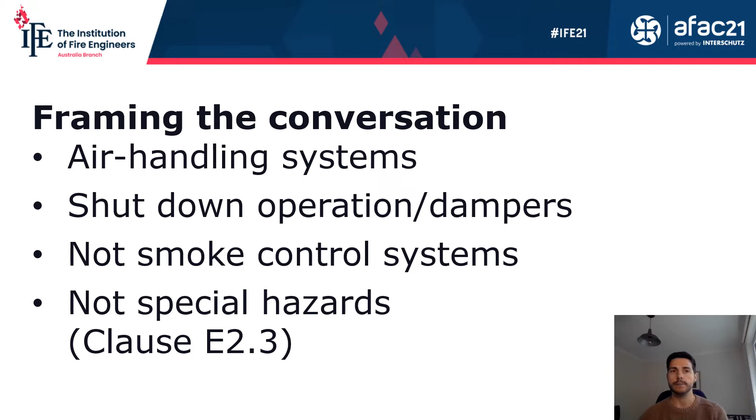I'll start off by giving you an overview of my presentation. First, I will talk about fire dampers and why fire dampers cannot necessarily protect against smoke spread through the air handling systems. I'll get into the changing construction practices around building envelope airtightness and how that affects the risk of smoke spread in buildings. That is followed by a discussion around what is acceptable levels of smoke spread between fire compartments.

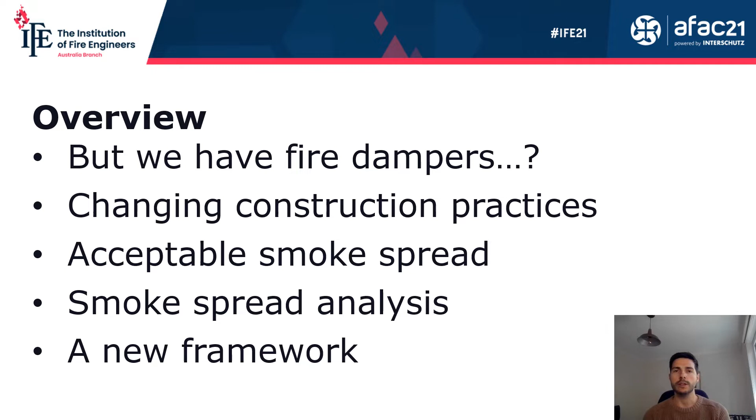Then I will relay the results of a technical analysis that was done in the proposal for change I submitted last year, which quantifies the amount of smoke that can spread between fire compartments. From that, I'll draw some conclusions and propose a new framework for deemed to satisfy compliance around smoke dampers.

There are a few key things that I want you to take away from my presentation today. Firstly, what I will say around smoke damper requirements and the interpretation of the deemed to satisfy provisions may conflict with your own interpretations and how you've practiced. It's not my intention to place any blame.

The DTS provisions around smoke dampers are very complex, and consequently it's no wonder that building practitioners differ in their interpretations. In my opinion, the deemed to satisfy provisions that govern smoke damper requirements are too complex and need to be amended to be made more clear.

Secondly, I'm going to show you that fire dampers cannot replace the need for smoke dampers. Each type of damper serves its own purpose.

Finally, the way we build buildings is changing. Increased air tightness of building envelopes and more prevalent internal sealing of compartments, for example with the use of smoke seals to doors, will have a dramatic effect on the risk of smoke spread in our buildings.

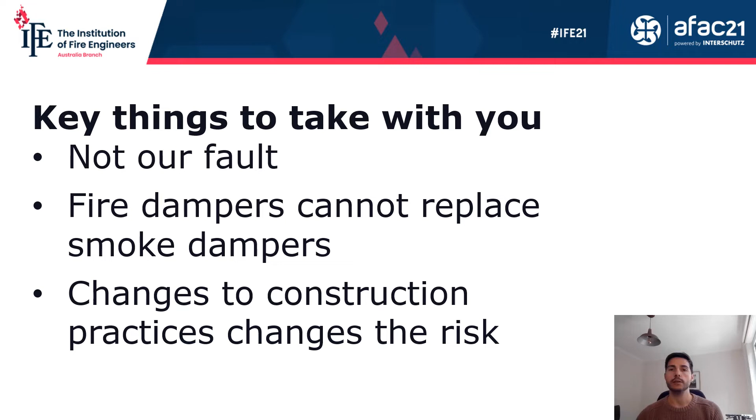Often I hear people say, why do I need smoke dampers when I have fire dampers in my air handling system? Well, to answer that question, we need to understand how a fire damper works. Fire dampers, as the name suggests, are there to mitigate fire spread.

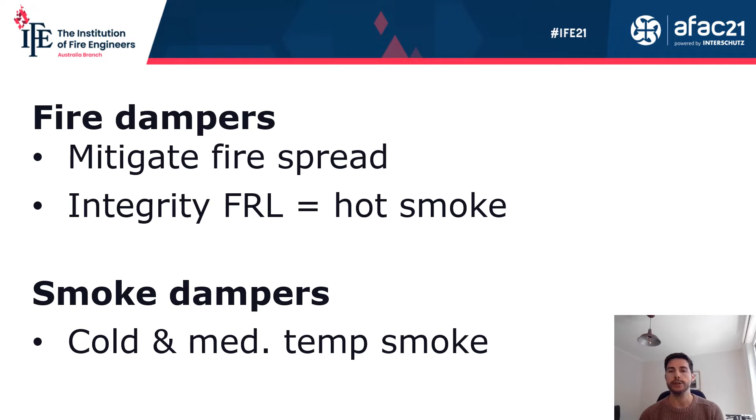A fire damper that achieves a fire resistance level in terms of integrity is there to prevent hot smoke from transferring between two fire compartments. A smoke damper, on the other hand, is designed to prevent the spread of cold and medium temperature smoke. And by medium temperature, I mean temperatures up to 200 degrees.

To understand the role of smoke dampers in fire protection of air handling systems, we need to understand the operation of fire dampers. In Australia, fire dampers can be mechanical, for example a curtain damper activated by a fusible link, or an intumescent damper, which is activated by the swelling material in the damper itself that closes the air path, or a motorized fire damper, which is driven closed by an actuator. Mechanical and intumescent dampers are the most common due to their low cost.

Let's have a look when fire dampers activate during a fire. In this example, we assume that the fire damper is an intumescent damper. Intumescent materials sometimes require temperatures well in excess of 200 degrees to activate.

On this graph, we've got two different time temperature curves shown. One is the standard ISO 834 time temperature curve used for testing of fire resistance levels in many countries around the world, which includes Australia. The other curve is a natural fire time temperature curve, which more accurately represents a fire that reaches flashover, turns into a fully developed fire, and then decays as the fuel in the compartment is consumed.

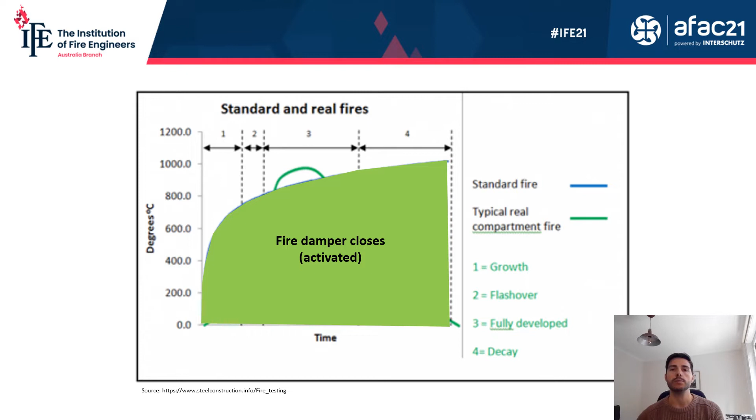Because of the rapid heating of a standard fire curve, the temperature is sufficient to activate the damper almost immediately. Therefore, if one assumed that the standard fire curve was representative of a natural fire, one would expect the fire damper activation to occur very rapidly.

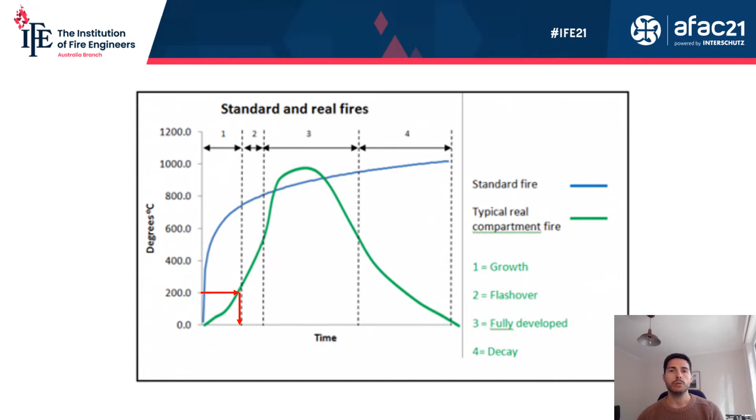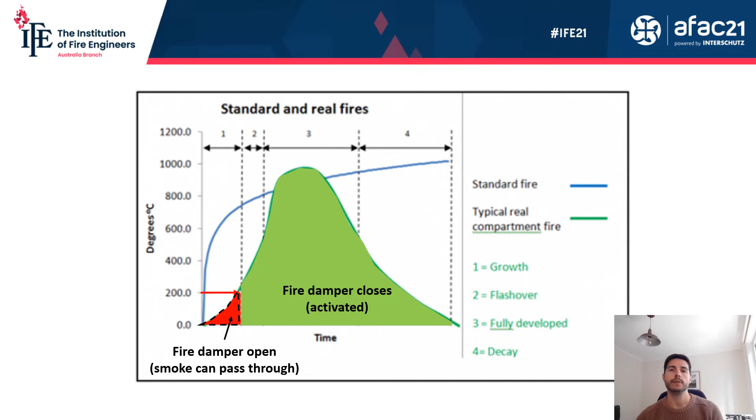However, if we subjected the same fire damper to a natural fire curve, then there will be a significant time period before the room exceeds 200 degrees Celsius, shown here by the red arrows. After the room reaches 200 degrees, we can assume that the fire damper closes. But in the time that the fire grows and the temperature is below 200 degrees, the fire damper remains open and smoke can pass through. During this time, smoke can spread through the air handling system.

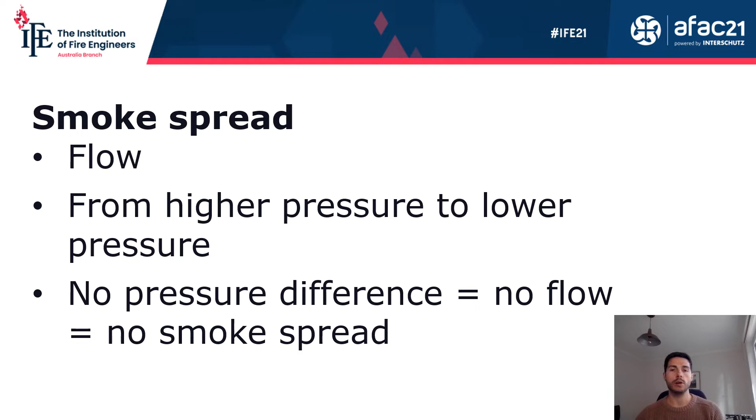Smoke spread through an air handling system is treated as a flow. Fluid flow, which applies to air and smoke mixtures, always flows from higher pressure to lower pressure. Therefore, if two fire compartments are connected by air handling system ductwork and there is a pressure difference between them, flow will occur from the higher pressure compartment to the lower pressure compartment. If there's no pressure difference, there's consequently no flow and therefore no smoke spread.

To understand the flow of smoke or smoke spread by air handling systems, we need to understand what happens to a compartment in the early stages of a fire. For the purposes of this discussion, we assume that the compartment is sealed, meaning any windows or doors are in their closed position and there are no major permanent openings to the outside.

A fire releases heat into the compartment. That heat leads to a volumetric expansion of the gases. However, because the expansion is constricted by the compartment, this instead leads to a pressurization, which I refer to as the fire-induced pressure. Because of that pressurization, the fire-affected compartment is at a higher pressure than the other compartments surrounding it, and smoke spread can occur due to the pressure differential generated.

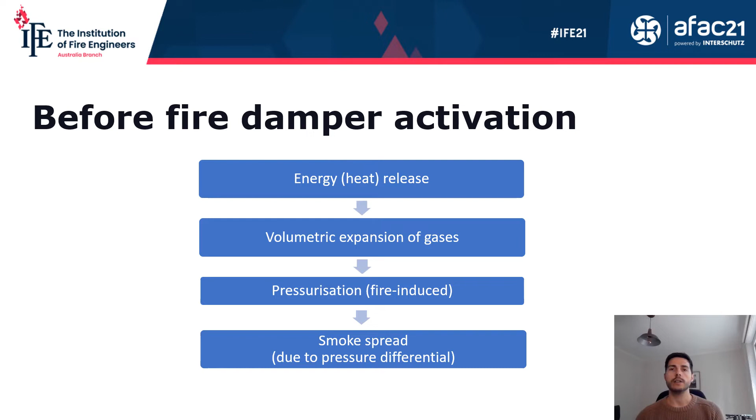It can be shown that the pressure induced by a fire in a compartment is proportional to the square of the rate of temperature increase. What that means is that the faster the temperature increases in the compartment at any given time, the greater the pressure.

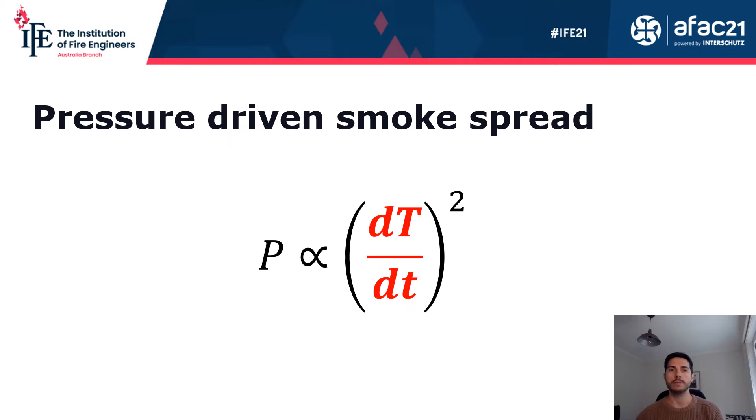To make things less abstract, let's take a look at the natural fire curve we used earlier. The rate of temperature increase at any given time can be visually expressed by the tangent line. In the early stages of the fire, the rate at which the temperature increases is greater than zero, and this creates an overpressure in the compartments.

When the temperature reaches its peak, in this case around 1000 degrees, the rate of temperature increase is zero. Consequently, there's no pressurization from the thermal expansion of gases. In the decay phase, when the temperature drops, this leads to an underpressure.

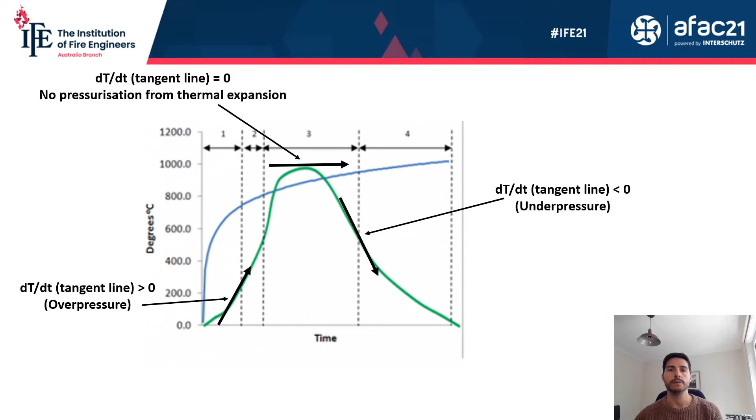Pressure that can be generated by fire is also proportional to the leakage from a compartment. The larger the openings, the larger the leakage, and the lower the pressurization.

Current trends in building include more energy efficient buildings. One key component in such buildings is limiting infiltration of outside air by using more airtight building envelopes. NCC 2019 saw the introduction of a verification method for building envelope performance, and we also have voluntary standards such as the passive house standard that are becoming more prevalent in Australia.

Internally, we're also using more acoustically sealed compartments, and that includes, for example, acoustic and smoke seals to doors. These trends lead to smaller and smaller leakages from our compartments.

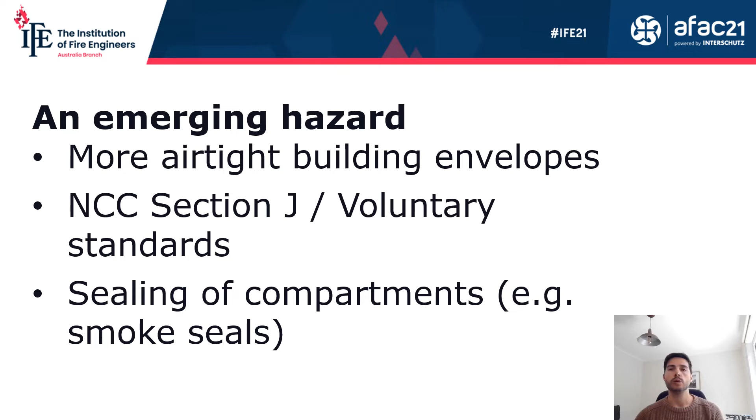To put things into perspective, this graph shows the minimum and maximum level of airtightness of 80 non-domestic buildings in Australia from a 2018 study. The maximum amount is about 18 and the minimum is about 0.2.

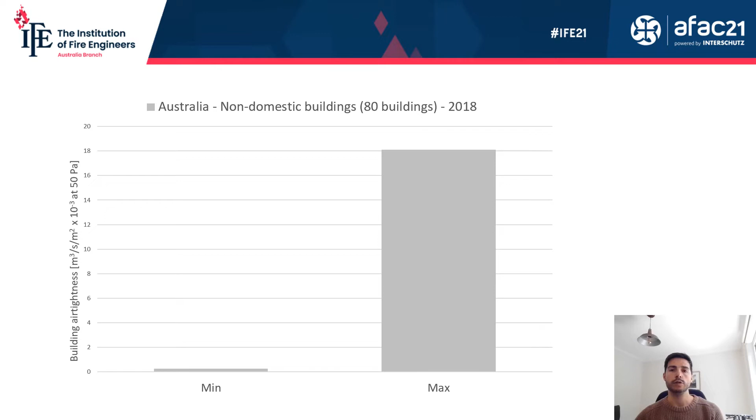In this graph, we've introduced a blue line that shows a maximum allowed leakage via the building envelope for commercial buildings that seek to demonstrate compliance with verification method JV4 for NCC 2019. The red line shows an approximation of the allowed leakage via the building envelope to meet the passive house standard.

What I'm trying to convey here is that older buildings have traditionally been much more leaky than the buildings that are being built now and into the future.

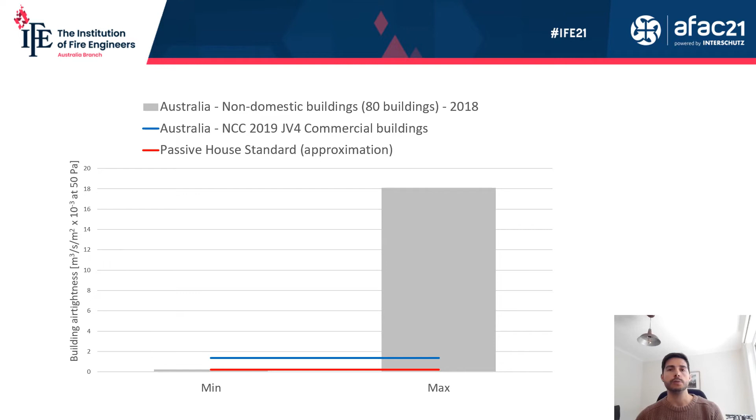With the improvements in building envelope sealing, what kind of fire-induced pressures are we talking about? To answer that question, we can draw on the results from a 2019 study I did on the peak fire-induced pressures that can be generated in a fire compartment of varying levels of building envelope sealing and internal sealing using smoke seals to doors. The results show that the older building stock was typically associated with pressures of 100 pascals or less. This level of fire-induced pressurization leads to minimal or no smoke spread through air handling systems. However, for modern or passive house levels of building envelope airtightness, the theoretical fire-induced pressure generated commonly exceeded 1500 pascals. Such fire-induced pressures will cause smoke spread through air handling systems if not managed.

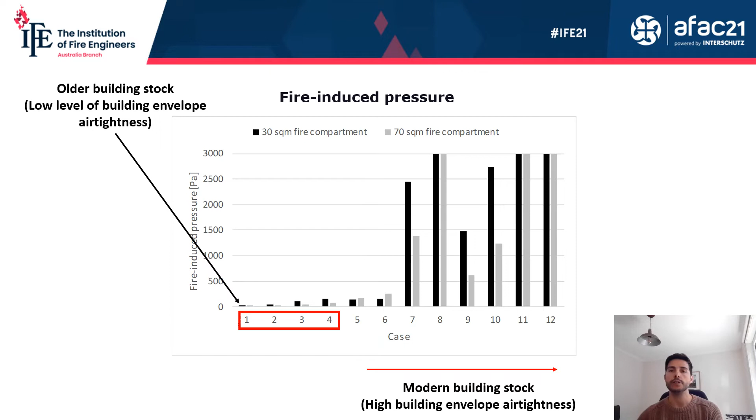That means that in the growth phase of a fire, the pressurization from that fire in a modern building will be much greater than that of an older building, despite the time temperature curve being identical.

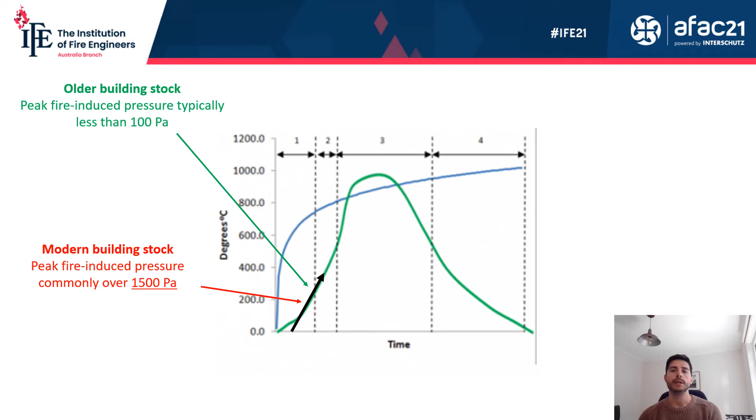So what are the consequences of these increased levels of pressurization from a fire in modern buildings? To give you an example, I want you to consider a building that has a mechanical supply and a mechanical exhaust system serving multiple fire compartments.

You can think of these fire compartments as hotel rooms. The mechanical supply and exhaust is each 50 liters per second to each room, and the branch pressure loss from a hotel room to a main duct for both the supply and exhaust system is assumed to be 50 pascals.

For our old building stock, where we can get a maximum of 100 pascals of pressure, the flow of smoke out from that compartment will be a maximum of 136 liters per second. However, in our modern buildings that can reach pressures of 1500 pascals, the flow of smoke is quadrupled and reaches 548 liters per second in this example. This has a massive impact on the risk of smoke spread.

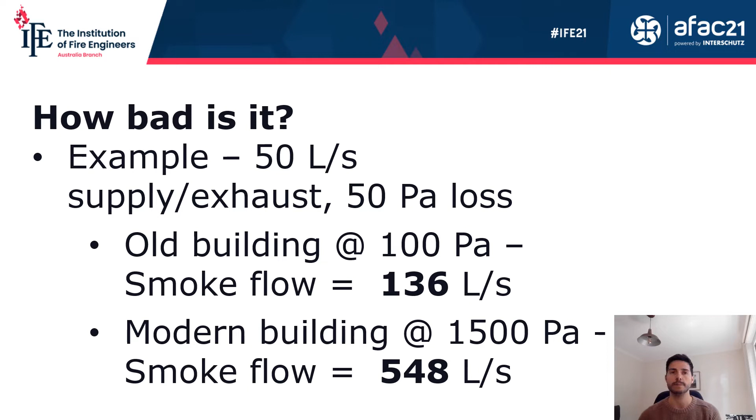Because our older building stock has been relatively leaky, high levels of fire-induced pressurization and smoke spread through air handling systems as a result of that pressurization is not a problem of the past. The problem is an emerging hazard as a result of the improved sealing of buildings that we're currently building and that will exist in the future.

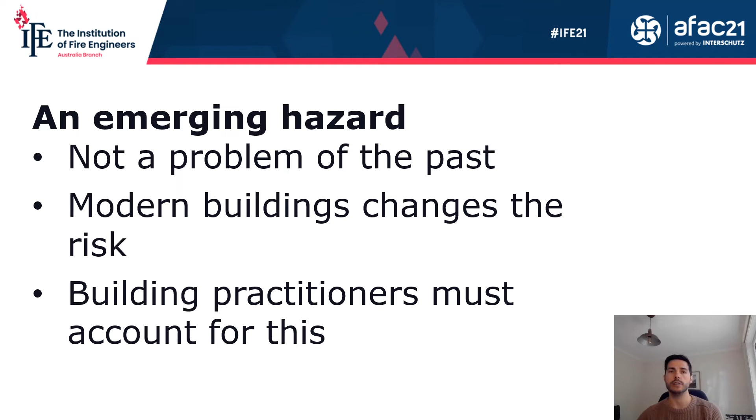It is important that we building practitioners are aware of this hazard so that we can adequately manage it in building designs. For those of you who are not convinced, I want to show you a video from a Finnish study. In this experiment, the firefighters light a polyurethane mattress inside the closet of an apartment.

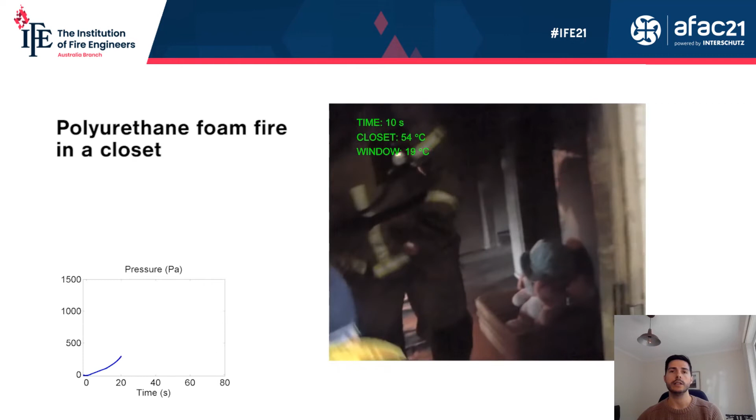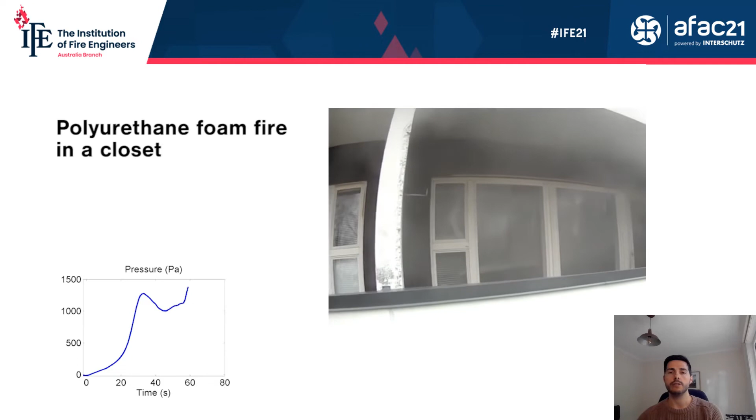In the bottom left, you can see a graph of the fire-induced pressure that is measured inside the compartment. At about 1400 pascals of overpressure, the window frame gives in and is pushed out of the wall from the pressure.

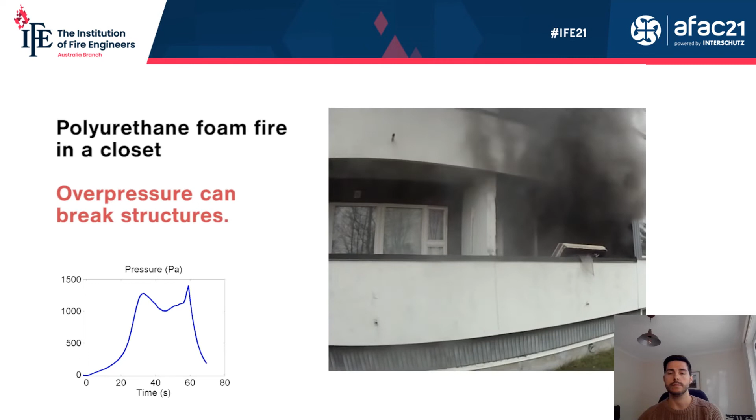Okay, so we've so far shown that fire dampers cannot protect against smoke spread in the early stages of a fire. We've also seen that in this stage of the fire, pressures can be high, especially in modern buildings.

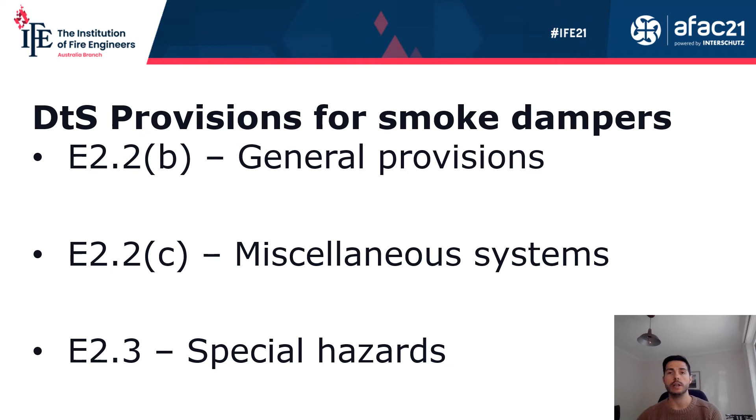Now I'd like to quickly review the deemed to satisfy provisions that apply to smoke dampers. In my opinion, these are E2.2b, which are the general provisions for air handling systems. There's also E2.2c, which applies to miscellaneous systems. I won't talk about kitchen exhaust systems, which are also covered by that clause. Finally, there's E2.3, which talks about special hazards. Again, that will not be covered by this talk.

Sometimes when I talk to building practitioners, they tell me that E2.2b is not applicable to their miscellaneous system, and instead only E2.2c applies. I disagree with this because the BCA is very explicit about where different clauses are mutually exclusive, and it uses the word 'or' to show this. There's no 'or' between E2.2b and E2.2c in the BCA. Therefore, in my opinion, both of these clauses apply to a miscellaneous system.

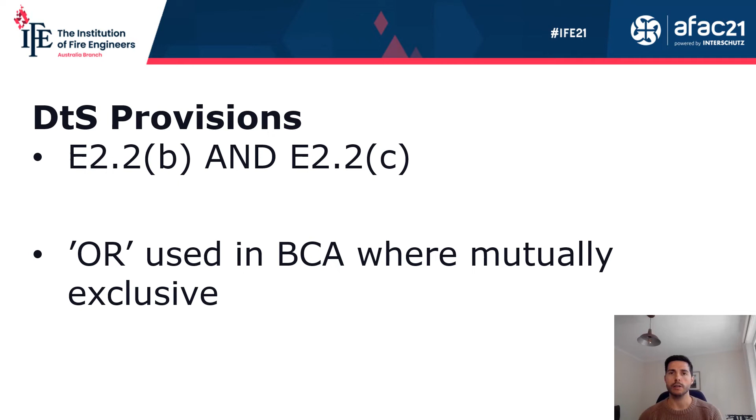E2.2b is a deemed to satisfy clause that I spent a lot of time reading. It is very complex if you ask me, more so than necessary. It includes a number of terms such as air handling system and smoke hazard management system that are not defined in the BCA. That just makes things worse.

Your first job with E2.2b is to determine if it applies at all. Say you've determined that the system is an air handling system and that it's not a smoke hazard management system. At that point, if the system recycles air between fire compartments, then E2.2b applies. However, if your system does not recycle air between different fire compartments, but the system may unduly contribute to the spread of smoke from one fire compartment to another, then E2.2b also applies.

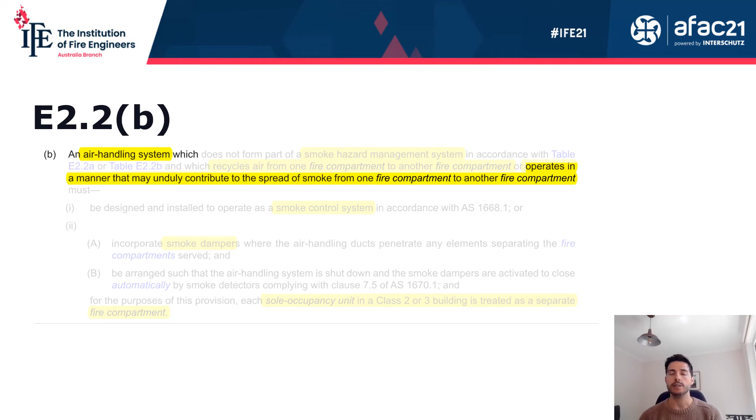If you ask me, the really tricky part of E2.2b is to determine what is unduly contribution of smoke spread between fire compartments by an air handling system. That's what I'll focus on in the next few slides.

What unduly contribution means is a judgment call by the building practitioners - in this case, the fire safety engineer and the building surveyor or certifier, in my opinion. I don't have the answer to what unduly contribution is, but I'll share a few of my findings here. That includes what is discussed in the guide to the BCA, also a survey among building practitioners, and what can be found in other regulatory frameworks.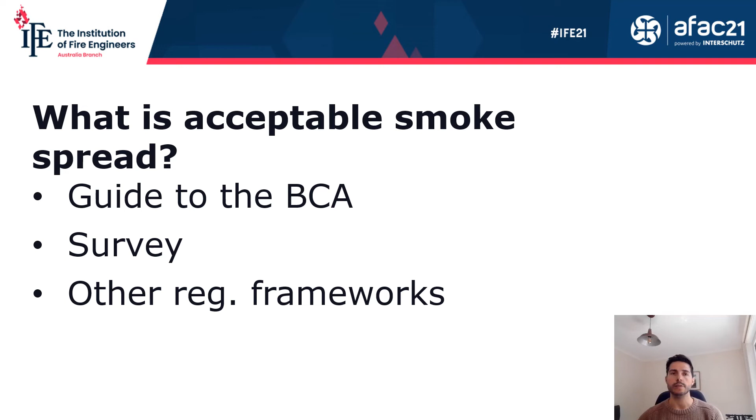The guide to the BCA is actually quite strict and suggests that the fire mode operation of air handling systems should not contribute to the spread of smoke between fire compartments. To me, this reads as no smoke spread is permitted at all.

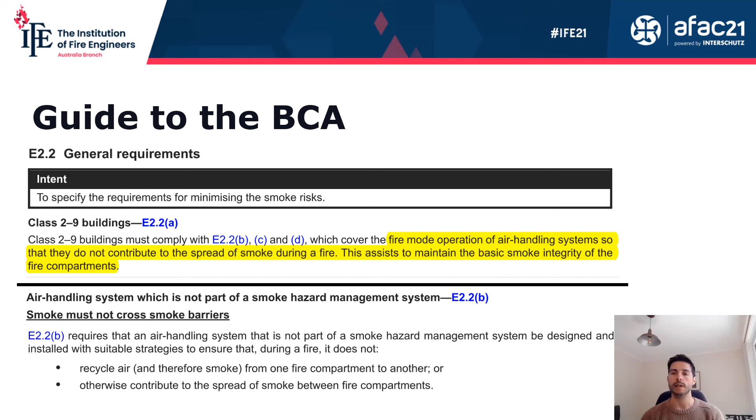As part of the proposal for change that I developed for NCC 2022, a survey was sent out to building practitioners around Australia. 122 people responded, and 115 of them had more than 5 years of experience of practicing.

The survey asked the people to answer the question: what does 'operate in a manner that may unduly contribute to the spread of smoke from one fire compartment to another fire compartment' mean?

38% responded that no smoke spread is allowed. Another 38% stated that it was okay to spread between 1 and 5% of the receiving fire compartment's volume. Only 1% stated that smoke spread was allowed to be more than 5%. So most building practitioners suggested that there was no or very little smoke spread allowed between fire compartments.

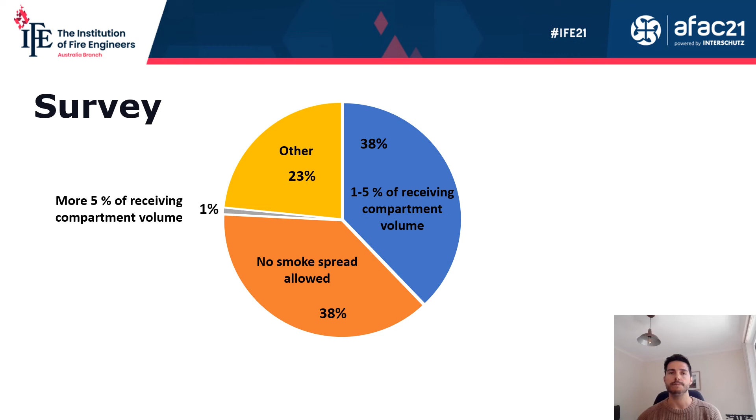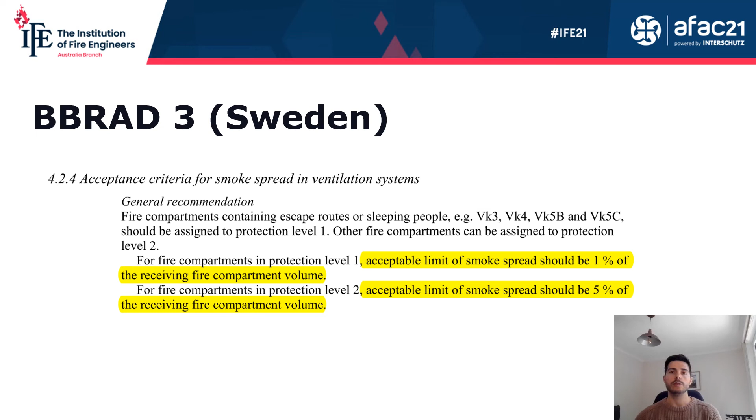The only regulatory framework for fire safety engineering that quantifies acceptable smoke spread between fire compartments is Sweden's BBRAD. In that framework, the acceptable limit is 1% of the receiving fire compartment's volume for any use that includes sleeping occupants. For other uses with non-sleeping occupants, the acceptable level is 5% of the receiving fire compartment's volume.

To make my case for why smoke dampers are required in general for air handling systems, in the proposal for change I submitted last year, I modeled how much smoke would spread between fire compartments through a few air handling system designs that were common to Australia.

All of these air handling system designs would be classified as miscellaneous systems and also what's referred to as minor systems. The building envelope airtightness was varied in the study and was either selected as the NCC 2019 verification method requirements for new apartments or the level required to achieve a Green Star credit. None of these designs were provided with smoke dampers.

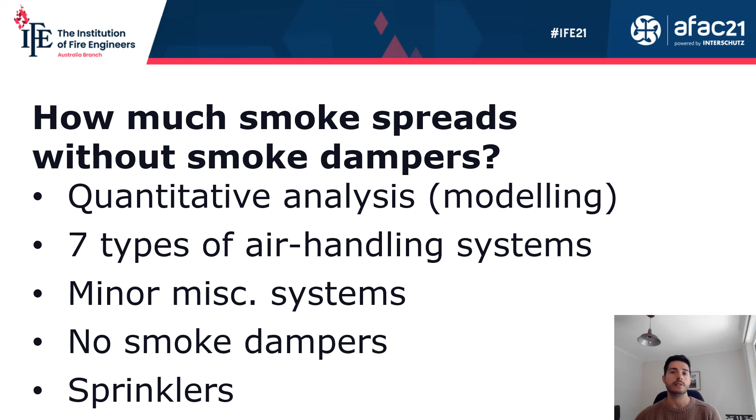The effects of sprinklers was analyzed as both cases where successful operation and failure were included.

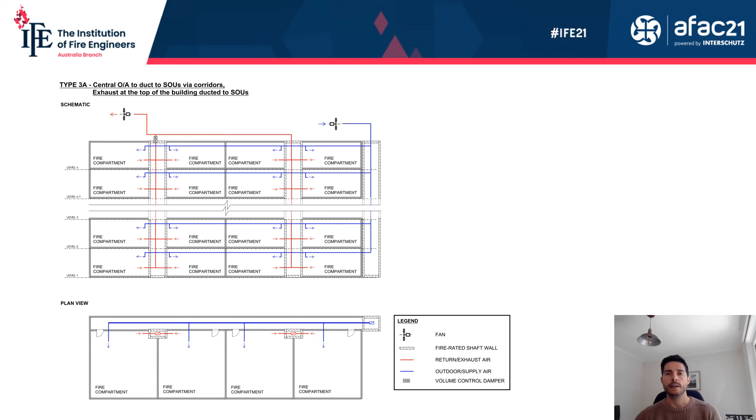This slide shows one of the common system designs that were analyzed as part of my proposal for change. It has a centralized outside air provided to the fire compartments. For example, you can imagine these as hotel rooms via ductwork in the corridor. We also have a few shared toilet exhaust fans providing exhaust.

This graph shows the results in terms of smoke spread for the 46 scenarios analyzed as part of that proposal for change. The volume of smoke spread is expressed as a percentage of the receiving fire compartment's volume. The minimum amount of smoke spread was 1.2% and the maximum was 82.3%. I want to stress that smoke spread occurred for all system designs.

I also want to point out that some of the cases included successful sprinkler operation, and that shows that successful sprinkler operation does not necessarily prevent large amounts of smoke from spreading through air handling systems.

With reference to both the guide to the BCA as well as the overseas acceptance criteria discussed earlier, all of these designs should be provided with smoke dampers. Based on the survey among building practitioners, it would also seem that most building practitioners would prescribe smoke dampers to these designs if they were told how much smoke would otherwise spread through the air handling system.

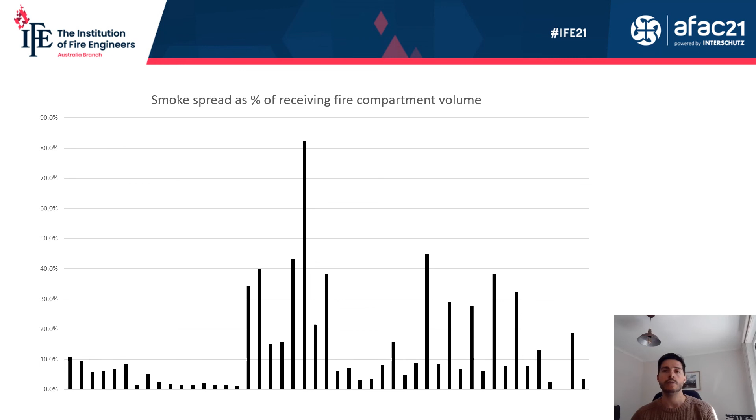The conclusion I drew from this is that smoke dampers should be assumed to be required for any general purpose air handling system in modern building designs.

Based on this conclusion, I developed a new proposal to amend clause E2.2b. The baseline assumption in this new clause is that smoke dampers are required except for openings in external walls. The new clause also defines what systems are exempt from compliance with E2.2b through the term air handling system for smoke control, and I'll show on the next slide exactly what those systems are.

E2.2b also includes a number of other clarifications to make it easy to interpret and to apply.

In my proposal, I've also suggested removing miscellaneous systems from E2.2c. In my opinion, the concessions granted to minor miscellaneous systems in Australian Standard 1668 Part 1 is a life safety risk to occupants in modern buildings. Those types of systems provide an adequate level of safety for our older building stock, but should be phased out as a compliance pathway for new buildings, in my opinion.

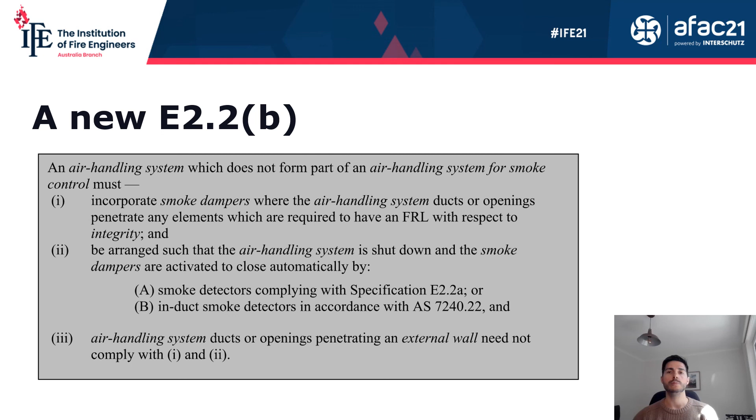Finally, I just want to show what systems were referred to as air handling systems for smoke control, which were exempt from the new proposed clause E2.2b. These are, for example, stair pressurization systems, zone smoke control systems, or smoke exhaust systems.

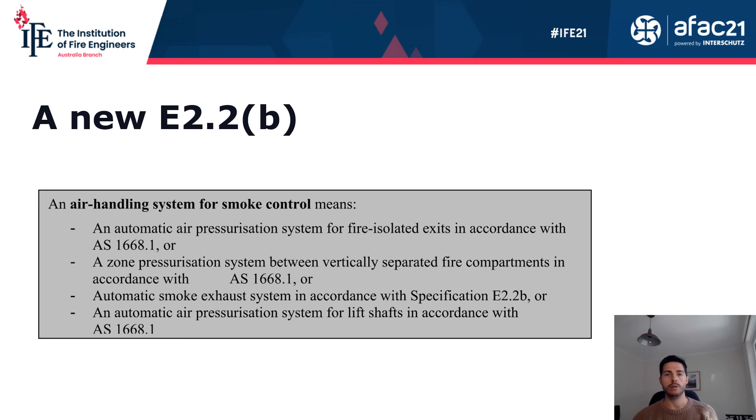That covers my presentation for today. However, for those of you who are interested in exploring this topic further, I have a few resources that I can share with you. Firstly, the proposal for change that I developed last year, which I've drawn upon today for this presentation, contains a large volume of information on the topic.

Secondly, and more in general around the effects of compartment pressurization and risk of smoke spread from fire as a result of more airtight building envelopes, there's a paper from 2019 that I did for Interflam that talks about this.

Finally, there is a number of research reports and peer-reviewed journal articles from Aalto University in Finland that are very, very good, that I highly recommend.